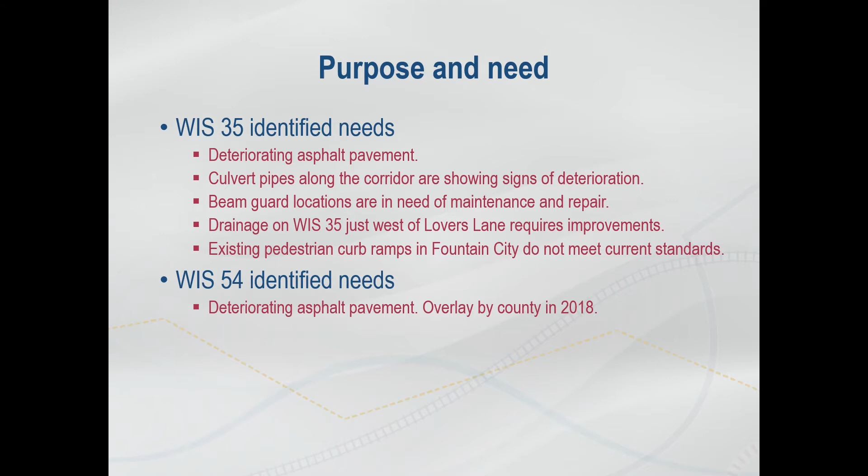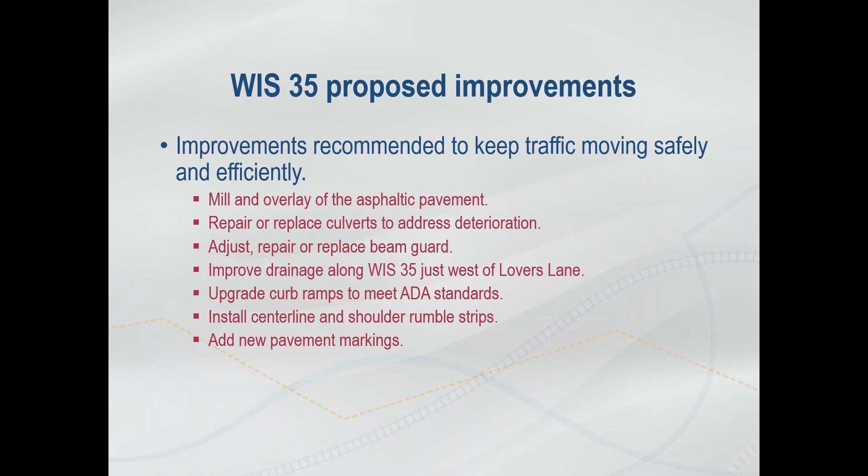Improvements proposed along Wisconsin 35 and 54 include pavement resurfacing with additional improvements to best address the project needs. This balances the level of investment in the roadway system while achieving added pavement life. Specific improvements along Wisconsin 35 recommended to keep traffic moving safely and efficiently include the following: milling and overlaying the existing asphalt pavement, repairing and replacing culverts to address the deterioration, adjusting, repairing, and replacing beam guard, improving drainage along Wisconsin 35 just west of Lover's Lane, upgrading curb ramps to meet ADA standards, installing centerline and shoulder rumble strips, and adding new pavement markings.

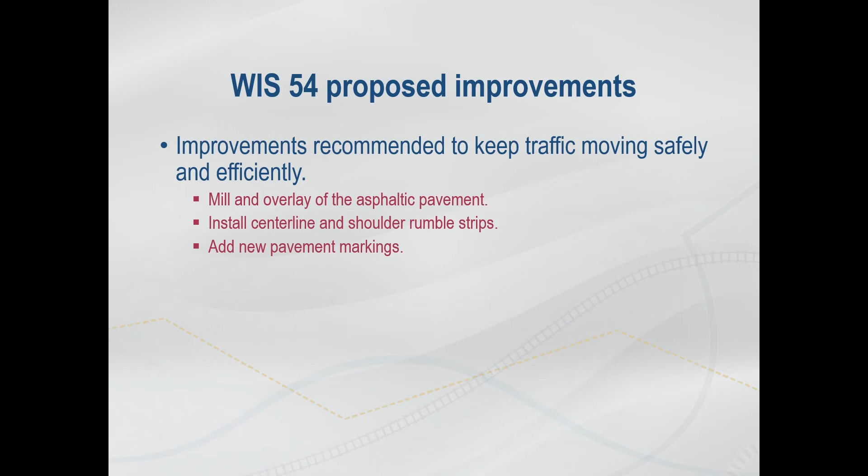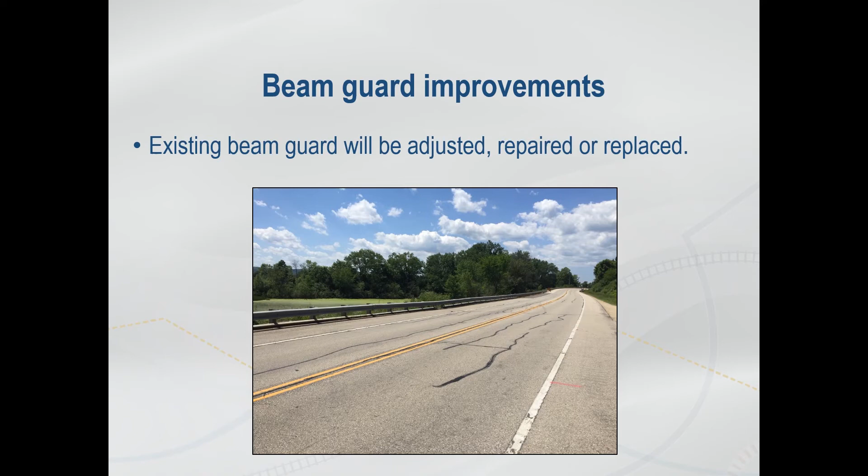Recommended improvements to Wisconsin 54 include milling and overlaying the asphaltic pavement, installing centerline and shoulder rumble strips, and also adding new pavement markings. Asphalt improvements include milling and overlaying the existing asphalt to extend the service life of the roadway. Culvert improvements include repairing and replacing deteriorated culverts. Beam guard improvements include adjusting, repairing, and replacing the existing beam guard located along the roadway. Several existing pedestrian curb ramps in Fountain City will be upgraded to meet Americans with Disabilities Act standards.

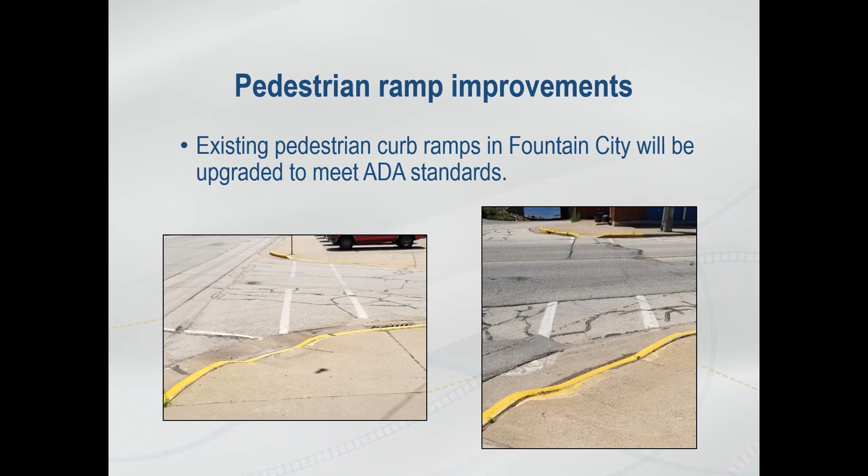Proposed construction staging includes the following: maintaining safety and mobility is important during construction. Proposed traffic impacts include flagging operations, shoulder closures, pedestrian staging during curb ramp work, and local and emergency access being maintained during construction. Work will be staged outside of local area events.

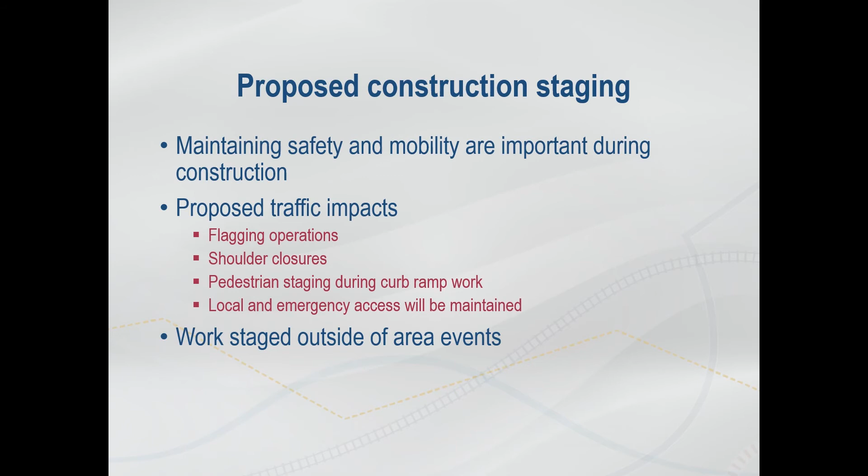Real estate needs for the project include minor permanent fee and temporary limited easements at the pedestrian curb ramp improvement locations. That acquisition process will be performed by the Wisconsin Department of Transportation. Individual property owner meetings will be held. The real estate acquisition process will begin in 2021 and into 2022. A landowner's rights brochure is located on this project website.

Property access modifications may be required. One access modification proposed at the property just west of Lover's Lane is to remove one of the two property access driveways and add a ditch for improved drainage along Wisconsin 35. There will be slight modifications to driveways in Fountain City to better accommodate drainage. Direct mailings and coordination will occur with property owners.

The current project schedule is as follows. Preliminary plans were prepared in April of 2020. A local officials meeting was held in June of 2020, and the public involvement is occurring now. Final environmental document is planned for October of 2020, with final right-of-way plat, if needed, in July of 2021. Right-of-way acquisition, if needed, occurring in the fall of 2021 into the winter of 2022. Final plans scheduled for May of 2022. Construction, dependent upon funding, could occur as early as the spring or summer of 2023, but is scheduled for 2026.